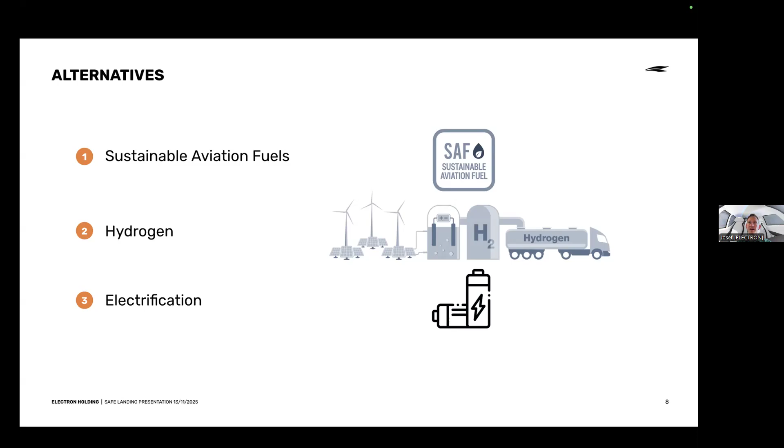Looking at the efforts happening in terms of electrification in aviation, it was mostly just eVTOLs at the time. There was a company called Eviation in the States building a nine-seater electric plane, which kind of seemed to go in a sensible direction - maybe not the initial designs with motors on the wingtips and stuff. But other than that, nothing much was happening. And of course, you're not going to be able to fly halfway around the world in an electric plane anytime soon, if ever - that's not going to be the solution for that.

But we'll come back to maybe the bigger picture a bit later.

So that's kind of the issues you saw, and I think at Safe Landing we recognize those issues as well in terms of timescales, sustainability and scalability of some of those options. And even if they are going to be an option, we've got multiple decades until we have them at scale, so we need to do something in the meantime. Most electric aircraft we've seen - you mentioned eVTOL, vertical takeoff and landing aircraft - have gotten a lot of focus and funding over the past 10 years, but not so much for just conventional aircraft that are powered electrically. So really interested in where you've gone with that.

So could you tell us a bit more about Electron? I understand there's sort of the aerospace company and the aviation section of it. What is your plan with that, your mission and your vision?

Yeah, so we looked at it, I talked with friends about it and tried to dissect the whole thing and understand how this is all going to play out over the long term, then worked backwards from that to where we are now. Again, automotive - we've seen this all play out once before. Tesla did not start with a mass-produced, low-price electric car. They started with the Roadster, a sports car that was originally a Lotus Elise converted to electric.

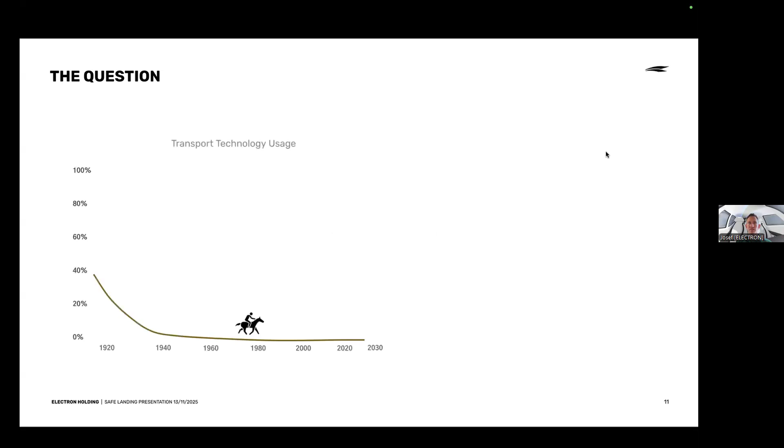Then what can happen is you can actually see something we've seen in the past before, which is, we had horses, then we had cars, then we had the train, and airplanes have come in and taken over a lot of the market share. It's still massively growing all around the world, aviation.

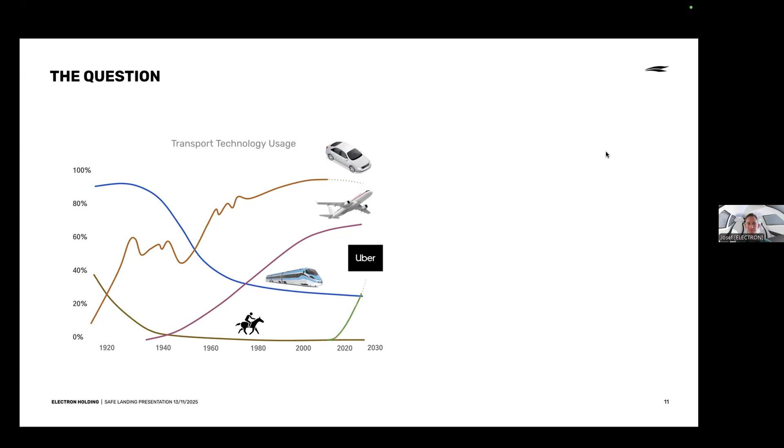More recently, we've seen Uber come in to make ride-hailing much more popular, and therefore taxis much more popular. So having shared mobility instead of everybody having your own car is a step in the right direction. But what if flying actually became as easy as booking an Uber? That's what we started thinking about with these small planes.

So today there's maybe 30,000 or so commercial planes out there, maybe 30,000 private planes, compared to 1.5 or 2 billion cars that are parked up 90% of the time as well. It's really interesting perspective to look at.

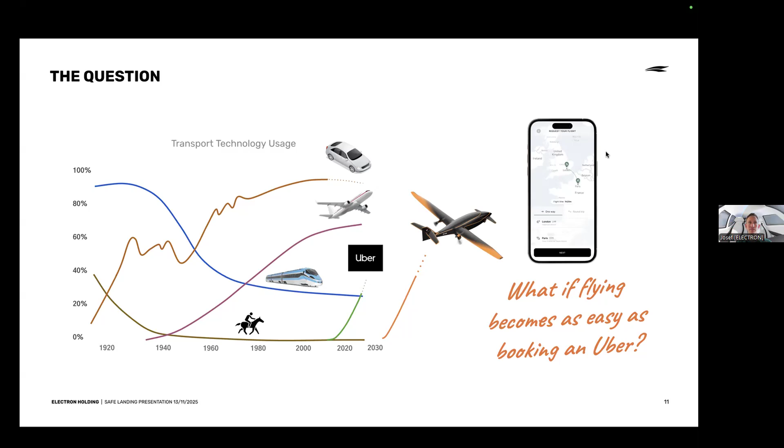And if you look at what that could mean, it's actually a massive move from the road into the sky. So there's a real strong positive opportunity here for aviation and aerospace to expand in a way that is sustainable. We can have some actual sustainable green growth.

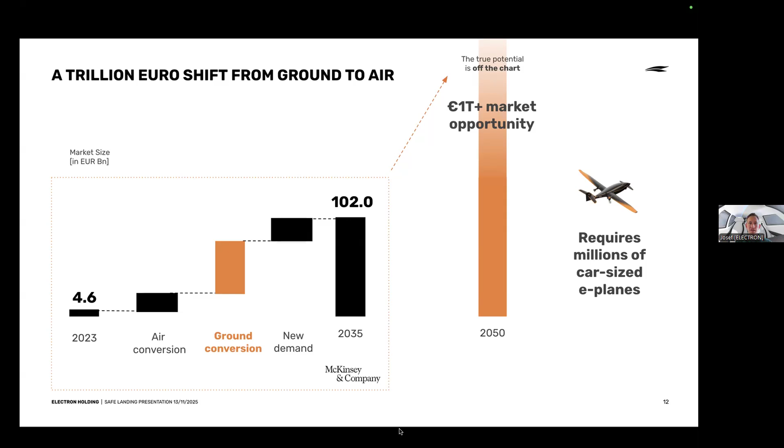And companies like McKinsey realized that this is likely to happen. There's a report they wrote in 2023, I believe, which breaks this down a bit, and they put some numbers to it, which is good to see. But that gives you an idea of the way we look at it and what we're working on.

I think part of that is when you try to think about being an operator buying electric aircraft to operate that ride-hailing experience, but with electric aircraft, you're finding there wasn't much out there that you could actually buy. The Pipistrel you mentioned is this trainer aircraft with two seats, so you've got the pilot and one other. You can fly for less than an hour. So at that point, we also realized we might need to consider designing and building our own thing as well.

Yeah, so if you look at the mission profile of what the service or aircraft needs to do, like we see in cars, typically it's around two people in a car, and also in private aviation it's around two people in the vehicle. And half of all private flights in Europe are less than 500 kilometers.

So if you look at this kind of journey profile of, say, 500 kilometers for two people, you don't need to go to an airport and be there an hour before, and the airport's probably also 15 minutes away from you instead of an hour away driving. Then actually your travel time is much shorter with an electric plane. The cost is comparable to train and commercial aviation, and the emissions are actually less because we use far less infrastructure and we use the vehicle much more than you use a car.

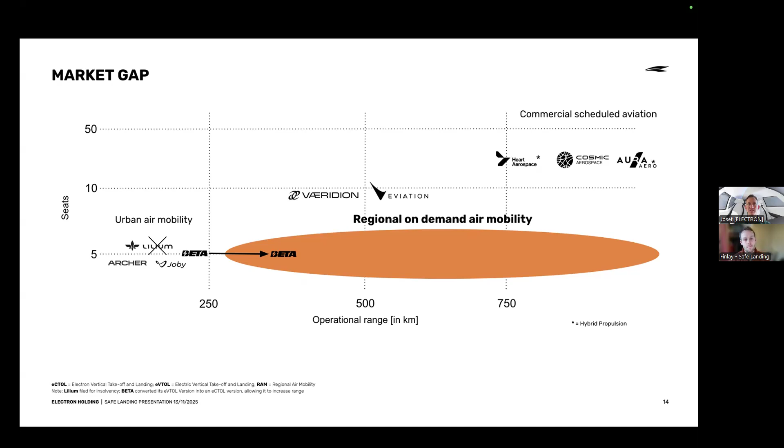There's a region where you need at least 250 kilometers before you can do anything, but McKinsey defined it as up to 800 kilometers. So between 250 and 800 kilometers. Recently we've seen Beta in the US, who started with an eVTOL, make a move to build an eCTOL, a conventional takeoff and landing version of their airplane, which is a step in the right direction into this potential market.

So that's the plane that we're working on. It will have by 2030 a range of around 1,000 kilometers. That is absolute maximum range with no passengers, no reserves, but that seems to be the metric that OEMs slap on their product folder. In reality it basically means an operational range of 750 kilometers. With the batteries we have today, we can already do 500 kilometers operationally.

So that's the 50% of private flights that we could already do. Just looking at the aircraft then, what's some of the key design elements of the aircraft, the design philosophy you're going for there? I can see there's quite a long, thin, straight wing.

As I mentioned, I'm literally writing the press release at the moment, but there is a new version of what the plane looks like. This perhaps looked a bit like the Piaggio Avanti, which is the world's most efficient turboprop, which has got the pusher propellers and the canard on the front. It doesn't look like that anymore for a few good reasons, had to do with certification, but overall it's designed to have a very good customer experience in terms of getting in and out of the plane. I'll come back to that in a minute.

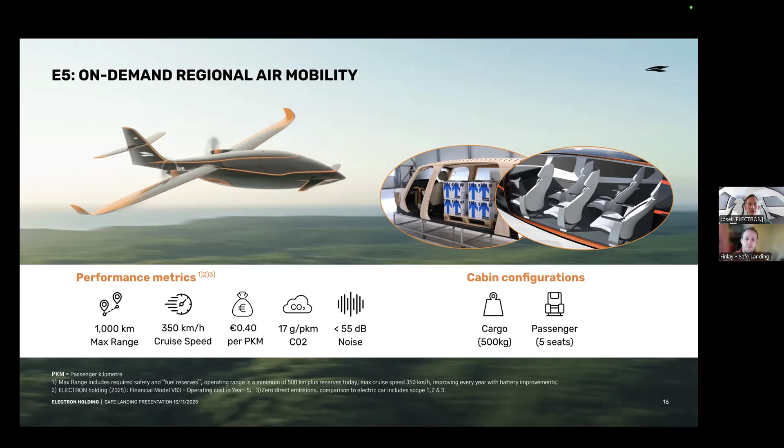So this plane is perfectly suitable for regional air mobility, flying passengers, but also cargo, medical transport, pilot training. The Pipistrel is a good first start for a single engine plane with a limited amount of range and duration, but when you do commercial airline pilot training, you eventually need to do twin engine work, get your dual engine rating, and you probably will also do your instrument rating in that plane.

So you need a plane like this to do it. Today we use, for instance, the Diamond DA42 a lot as an example. And then there are some dual-use applications this plane would be suitable for as well - we live in a different world now than in 2020, in terms of what's going on in Ukraine, so we need not forget that. As I mentioned, that's the kind of plane our electric, zero-emission plane could replace - this is a Diamond DA62, two combustion engines, room for six people but no luggage, or four people with luggage. Similar kind of size to what we're building.

And so it's quite different from those other electric aircraft, competitors elsewhere on the market that you showed in that diagram - the eVTOL, the vertical takeoff and landing, with relatively complex geometry, lots of propellers, a high amount of energy to take off and land, and then some of the hybrid electric ones for larger passengers, longer haul, where it's not fully electric - there's a hybridization with a gas turbine plus electric drive, and maybe a series of propellers as well.

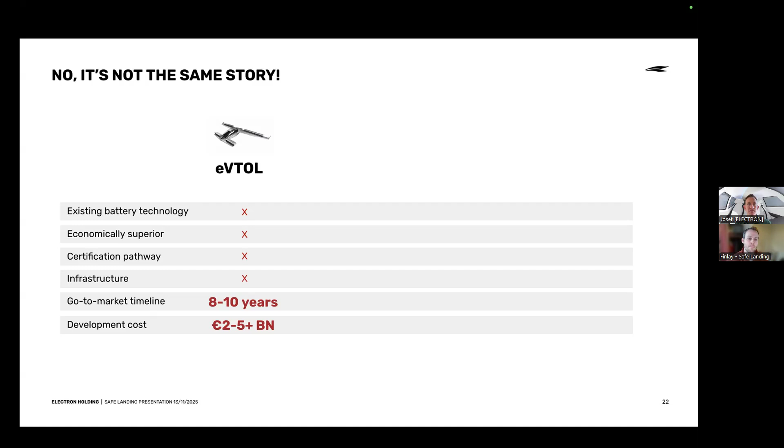If you look at the financials that Lilium, for instance, was showing before they went bankrupt, we think this could be like a decade before it enters the market. And development cost, it's an unknown number, but in the billions.

And then if you look at a car-sized plane, the battery technology is there. It's cheaper to operate than a combustion engine plane. The certification pathway already exists. We have the Pipistrel already flying. All those small airports that we already have, we can use. And actually, a project like this should only really take 4 to 5 years to get it certified if done right. And we can also back test this to similar sized planes that we've done over the years around the world, so we know roughly what it would cost to get a plane of this size and complexity certified.

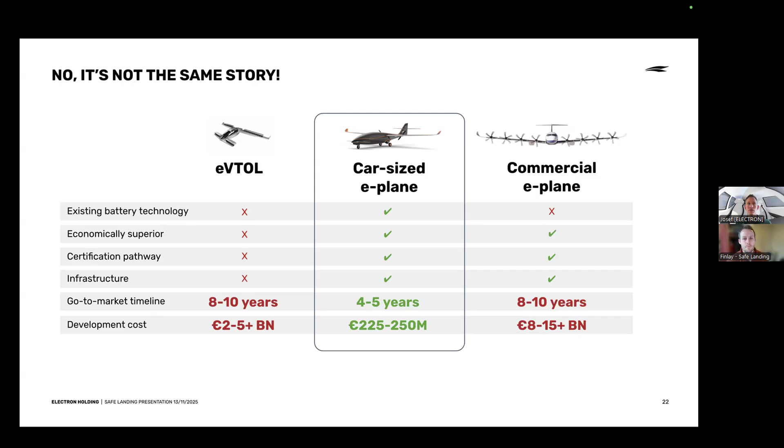And then looking at the big plane again, the battery technology isn't quite there yet, unfortunately. Maybe early 2040s you can expect a battery electric short haul plane to be viable from a battery technology perspective. It would be cheaper to operate them. Of course, the certification infrastructure is there, but it's still a decently long project, and it will cost you around 10 billion to get a plane of that size certified, which is just a complete non-starter from a startup perspective.

So in terms of hybrid, it's funny because in automotive, the first move into sustainability was effectively the Toyota Prius with a hybrid car. Cars are really inefficient in terms of converting energy into movement. The motor, you want like 100 horsepower for a short period while you accelerate, and then you're only using like 10 horsepower to maintain that speed.

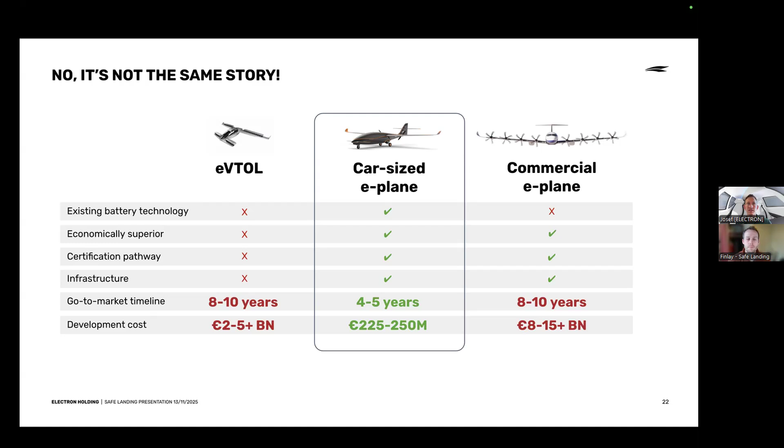In aviation, we use pretty much full power for the whole climb, and then we run at like 60, 70, 80% of power during cruise, and then we go down to next to nothing in the descent. It's a completely different energy profile, power profile. So going for a hybrid system basically means in practicality you end up with a very, very short zero emissions range. You'd probably be flying on hybrid mode most of the time, which would still be better, but you do not get the massive cost benefits of pure electric. So if you can do the mission pure electric, then do it. If the batteries weren't good enough, we would have said, okay, let's do a hybrid first. But actually, it turns out that the battery is good enough for this mission profile, if that makes sense.

So I suppose that's the product itself. When it comes to actually the aviation business, how these might be operated, can you explain a bit more about how you're thinking that would work?

Yeah, so I mentioned the infrastructure earlier. So if I just show you what I mean, there is roughly 60,000 or so small airports around the world that we can tap into. But today, around 80% of the passengers travel through just 1% of those airports. So that's the busy kind of routes like London, Amsterdam, Amsterdam-Paris, but also, of course, the long haul flights like Amsterdam-New York, those kind of things. The vast majority of those small airports are underused, and we could tap into those.

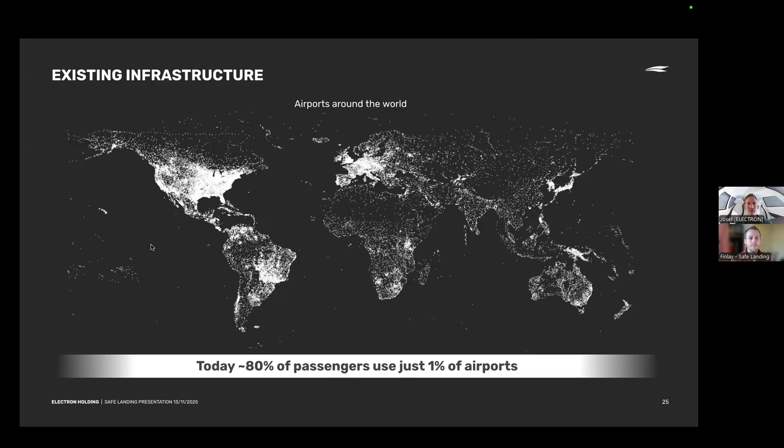And they're already being used by private aviation today. Not necessarily think of the really expensive private jets with caviar and champagne, but think more of business people traveling from A to B. And those kind of operators are already flying, for instance, the Diamond aircraft that I showed you today, and other small combustion engine planes. And so instead of operating the planes ourselves, next to also manufacturing it, which is just a step too much to do, we're just selling the planes to those operators globally.

Yeah, so I guess like you were saying, airlines sort of get interested once you get above 80 seats, probably into multiple hundreds, which will come later. So I'm quite keen to get your thoughts on, if politicians did get their act together and we enacted rapid climate action and progressive policies in aviation, what is your vision for, over the next few decades, how air transport might transform, and how that flying experience might change for passengers that are flying.